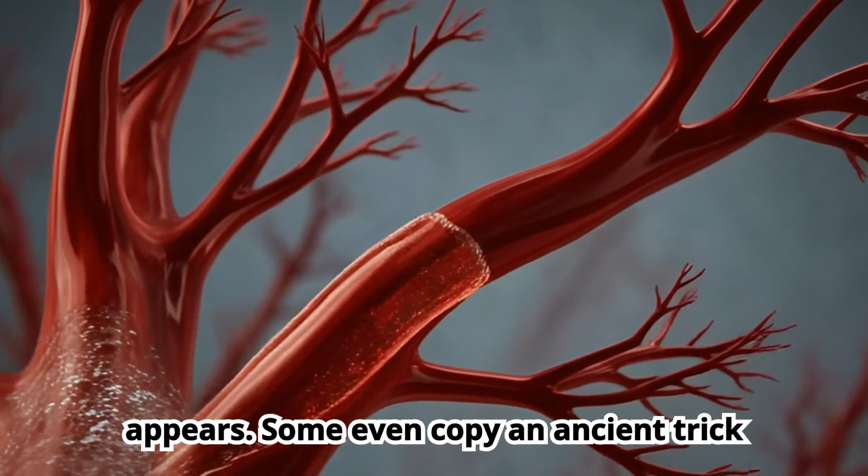Some even copy an ancient trick the Romans figured out 2,000 years ago, and then somehow forgot. This isn't theoretical. It's already being poured into tunnels, highways, offshore wind farms, and nuclear facilities. And if it scales, it could quietly reshape $1 trillion of global infrastructure, slash carbon emissions, and redefine how long

our civilization's foundations last. So why isn't everyone using it already? Why do most buildings still rely on a material we know is destined to crack? And why might the biggest obstacle to this breakthrough have nothing to do with science at all? That's where the real story begins.

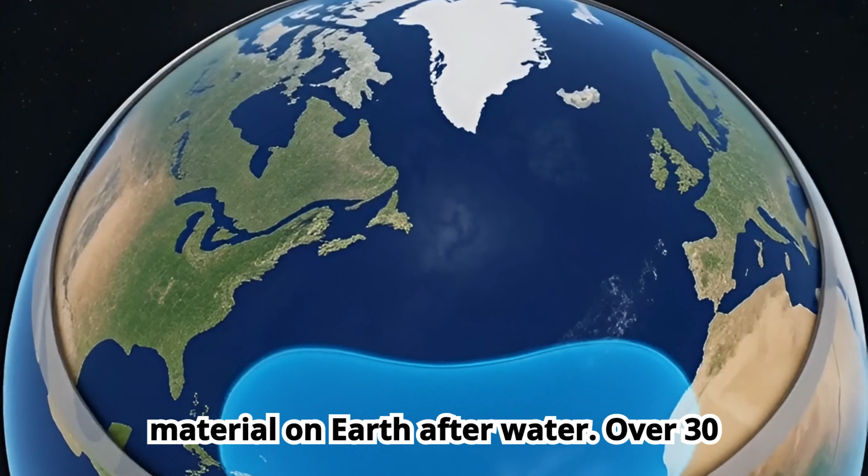Right now, while you're watching this, millions of concrete structures across the world are aging toward failure. Not dramatically, not visibly, quietly. Concrete doesn't fail like glass. It fails like debt, slowly, invisibly, then all at once. Here's the scale most people never think about. Concrete is the second most consumed material on Earth after water. Over 30 billion tons are poured every year. Entire civilizations are quite literally resting on it.

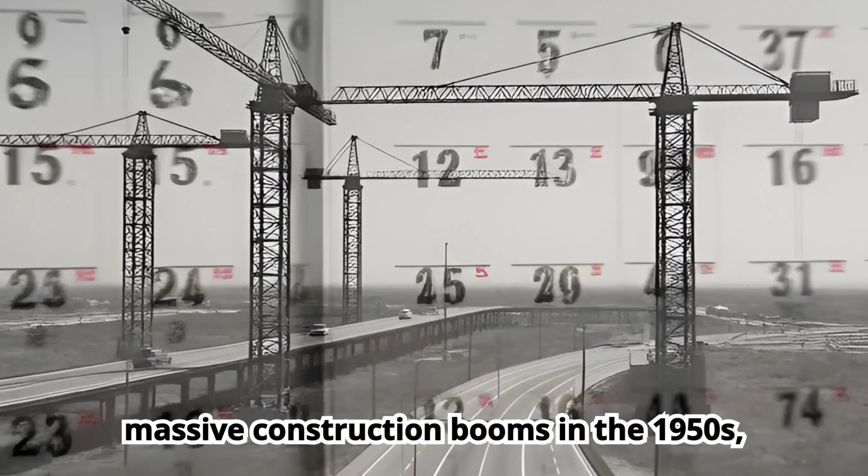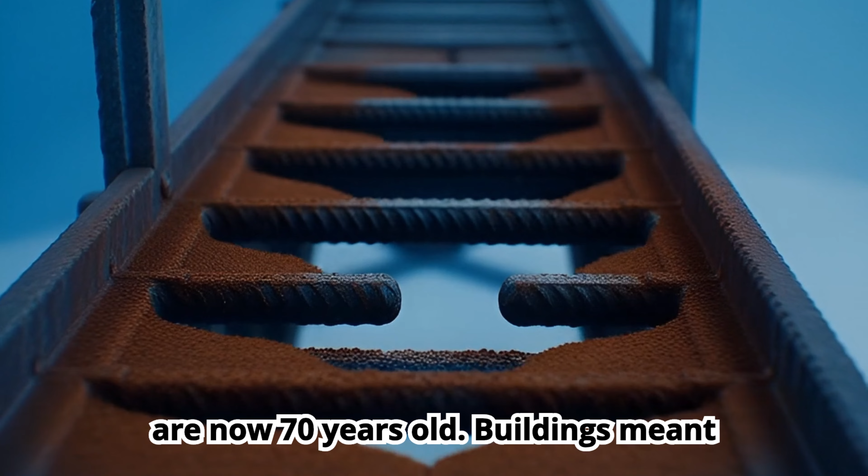And much of that concrete was poured during massive construction booms in the 1950s, 60s, and 70s, which means a huge percentage of global infrastructure is now entering its failure acceleration phase. Bridges that were designed for 50 years are now 70 years old. Buildings meant to last a century are quietly bleeding strength from the inside. Tunnels, dams, and foundations are absorbing decades of stress, salt, freeze-thaw cycles, and corrosion.

This isn't a future problem. It's a now problem. In the United States alone, engineers estimate trillions of dollars are needed just to keep existing infrastructure from collapsing into obsolescence. Globally, the number is far larger. And here's the brutal truth. We cannot afford to rebuild everything. Not financially, not logistically, not environmentally.

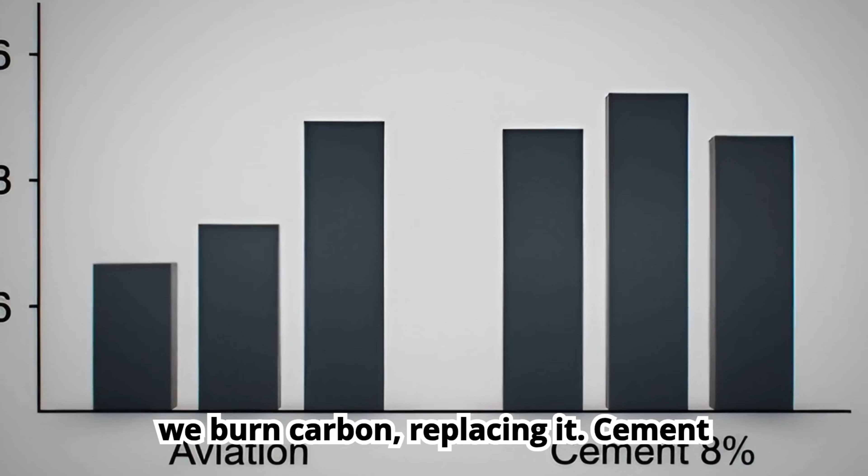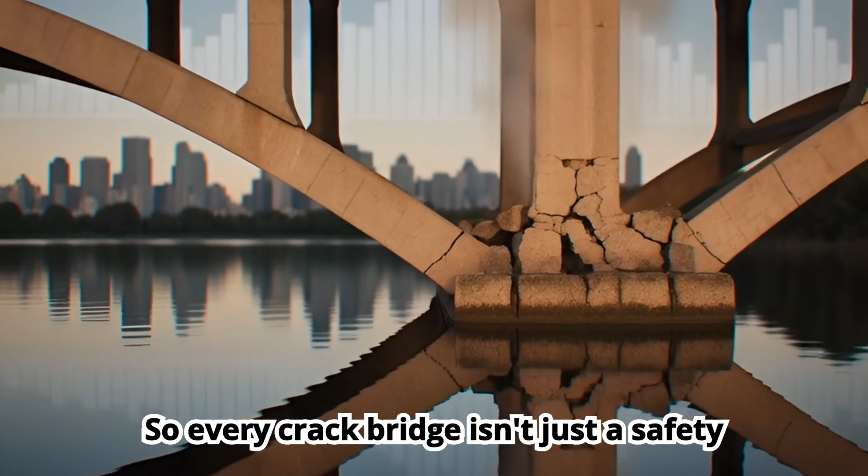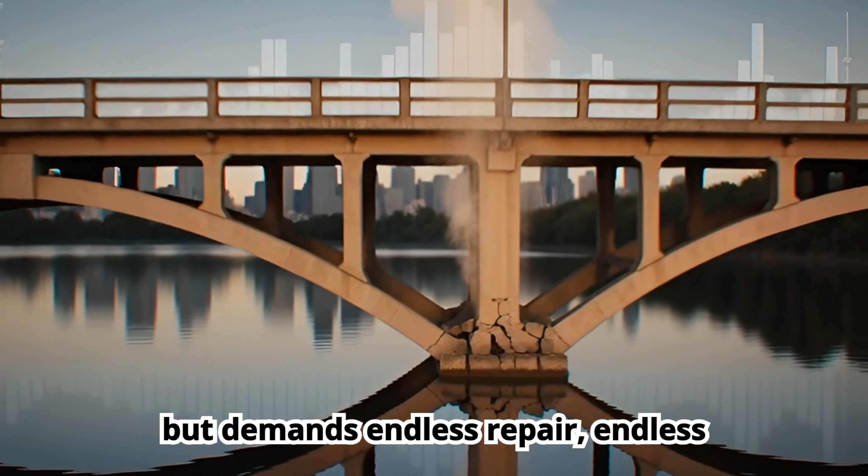Every time concrete fails, we don't just lose a structure, we burn carbon replacing it. Cement production alone accounts for roughly 8% of global CO2 emissions, more than the entire aviation industry. So every cracked bridge isn't just a safety risk, it's a climate liability. This is the trap modern civilization is stuck in, a material that enables growth, but demands endless repair, endless replacement, endless emissions. Unless the material itself changes, unless concrete stops behaving like something that slowly dies and starts behaving like

something that responds. Self-healing concrete doesn't just promise stronger structures. It promises fewer disasters, lower taxes, lower emissions, and infrastructure that doesn't wait to fail before it's fixed. But to understand how radical that is, we need to go back, not forward, back nearly 2,000 years, to a civilization that accidentally solved this problem once already, and then somehow lost the knowledge.

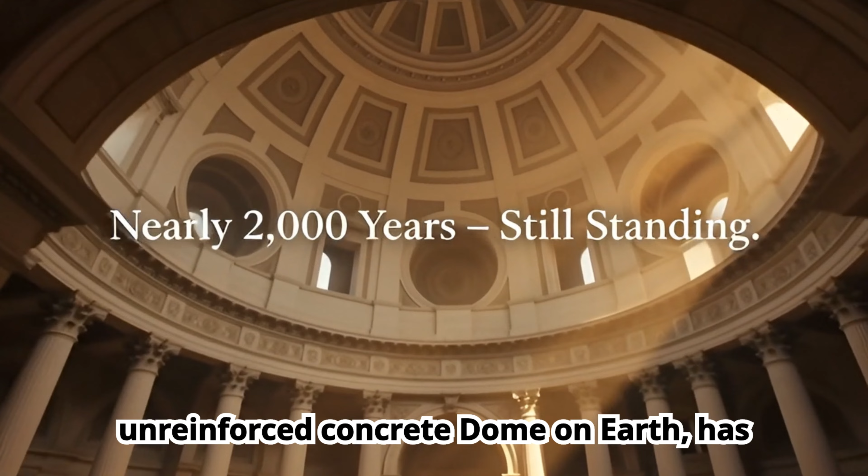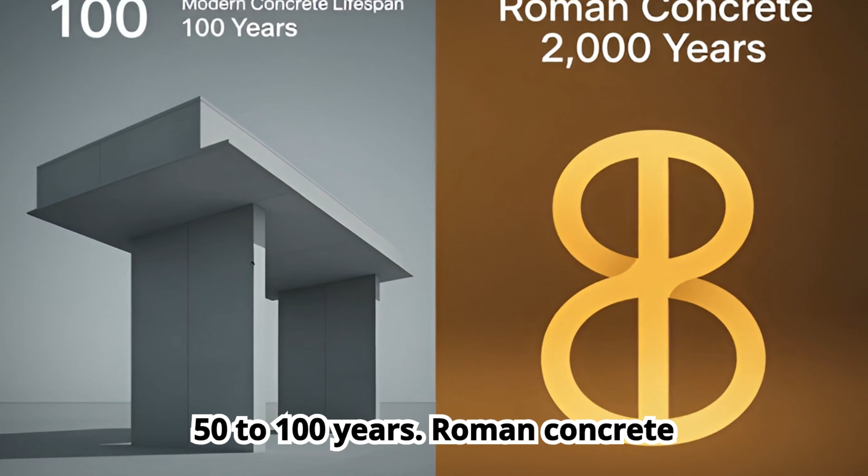Walk through the ruins of ancient Rome, and you'll see something unsettling. The Pantheon's dome, still the largest unreinforced concrete dome on Earth, has stood for nearly 2,000 years. Roman harbors sit submerged in seawater, yet remain intact. Break a piece of Roman concrete open, and instead of crumbling, it looks denser than when it was first poured. This shouldn't be possible. Modern concrete is engineered to last 50 to 100 years. Roman concrete has lasted 20 times longer in harsher conditions, without steel reinforcement, without modern chemistry.

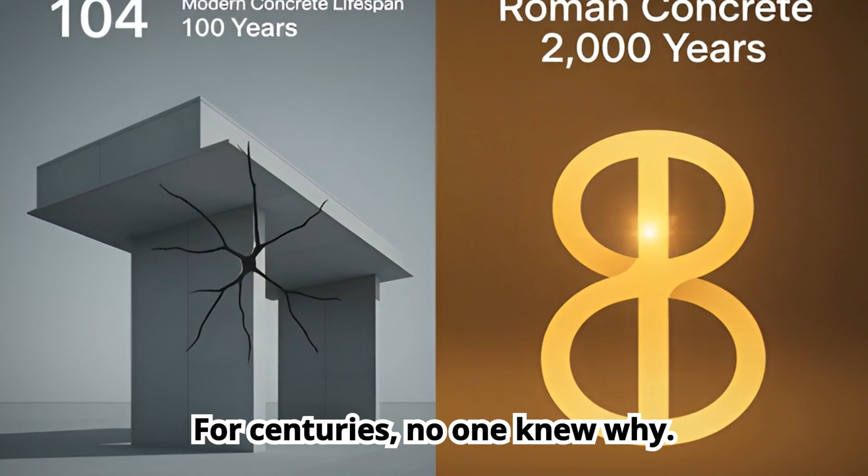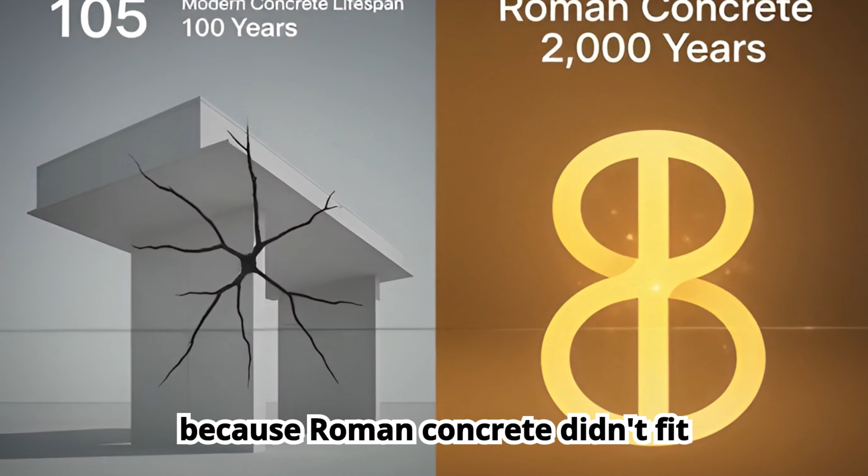For centuries, no one knew why. Historians assumed it was superior craftsmanship. Engineers blamed luck. Most modern builders simply ignored it because Roman concrete didn't fit industrial workflows. Then, in the last few decades, material scientists started looking closer, under microscopes, under X-rays, at the atomic level. And what they found changed everything.

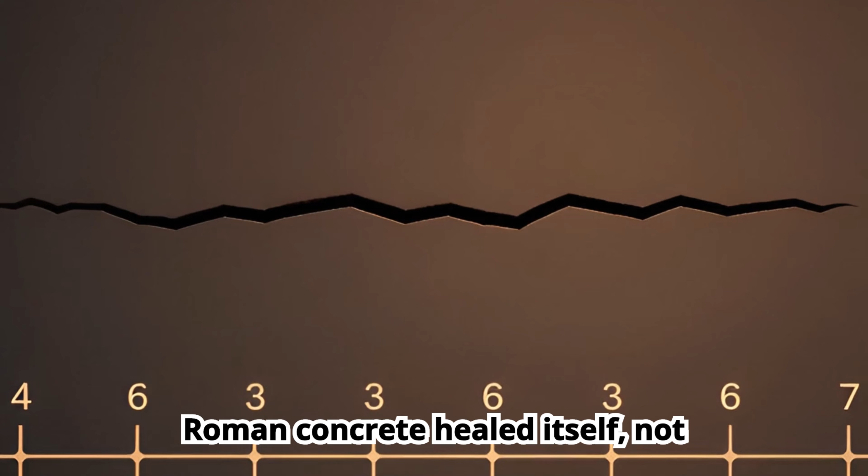Roman concrete wasn't uniform. It was alive with chemistry. Embedded throughout the material were tiny white mineral inclusions, once dismissed as poor mixing. In reality, they were reactive lime clasts. When cracks formed, water seeped in. The lime reacted. New minerals crystallized inside the crack, sealing it shut. In other words, Roman concrete healed itself. Not perfectly, not instantly, but continuously over centuries. This wasn't intentional biotechnology.

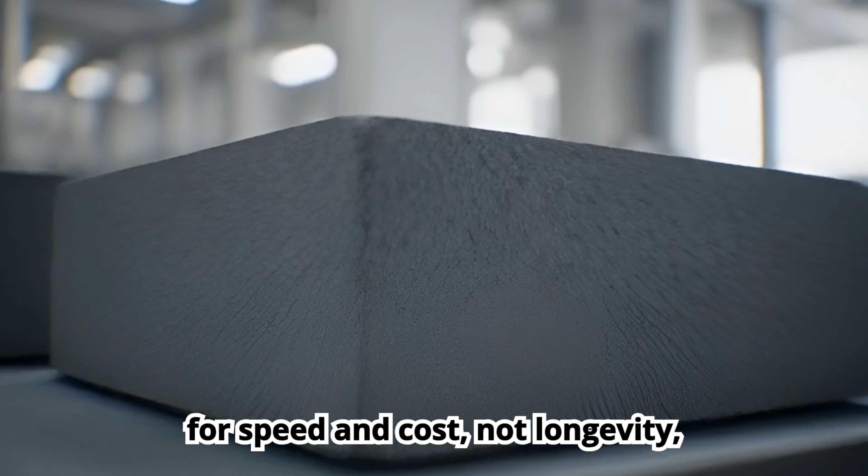It was an accidental discovery born from volcanic ash, quicklime, and a construction process that created built-in chemical redundancy. And here's the uncomfortable part. Modern engineering optimized concrete for speed and cost, not longevity. We standardized it, smoothed out its imperfections, removed the very features that allowed it to adapt. In the process, we made concrete cheaper and far more fragile.

Roman builders didn't know the science, but they understood something modern systems forgot. Durability isn't about resisting damage forever. It's about recovering from damage when it inevitably happens. That ancient insight is now colliding with modern science in a way the Romans could never have imagined, because today, self-healing concrete doesn't rely on accidents. It's engineered down to the microscopic scale. And the mechanisms scientists are using now are far more radical than lime and ash.

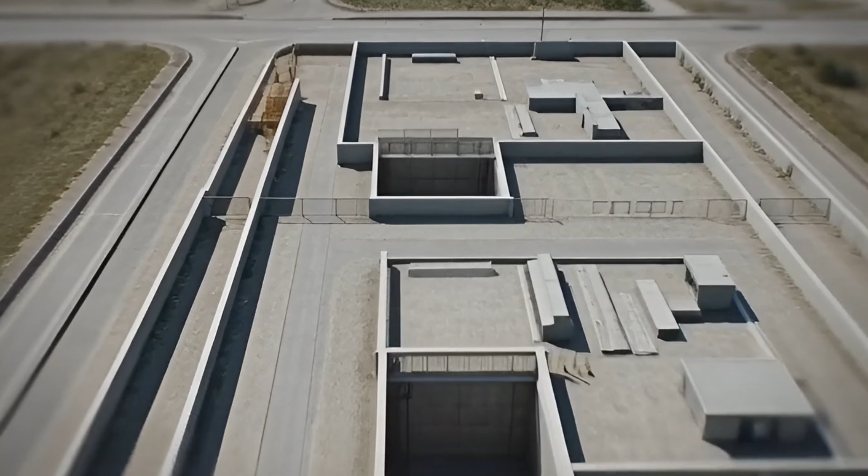To understand self-healing concrete, you have to let go of the idea that concrete is inert. It isn't. Concrete is a chemically active system that never fully stops reacting. Cracks don't mean it's dead. They mean stress has found a path. Self-healing concrete works by turning that weakness into a trigger. The most widely studied approach uses something that sounds almost absurd: bacteria. Specifically, dormant spores of bacteria that can survive for decades without food, oxygen, or light.

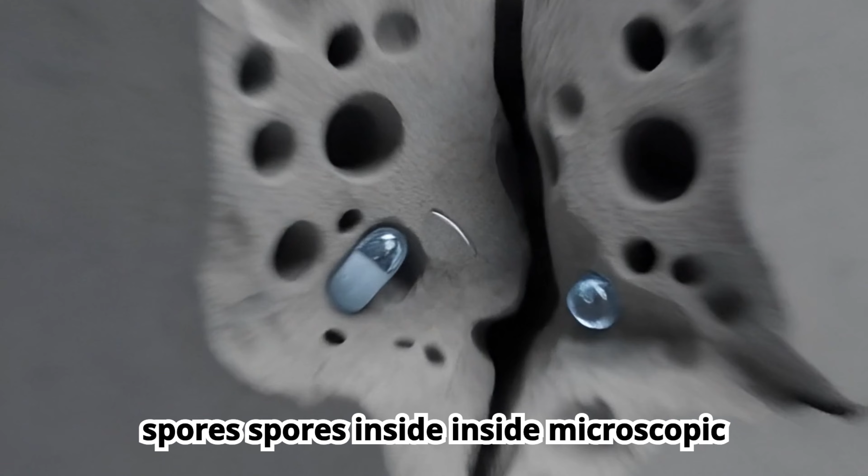Scientists embed these spores inside microscopic capsules mixed into fresh concrete. Alongside them, nutrients, often calcium lactate. When the concrete is intact, nothing happens. But when a crack forms, water enters. That water wakes the bacteria. They metabolize the nutrients and produce calcium carbonate, the same mineral found in limestone and seashells. The result? The crack fills itself with new stone. No sensors, no electronics, no human intervention. Just chemistry responding to damage.

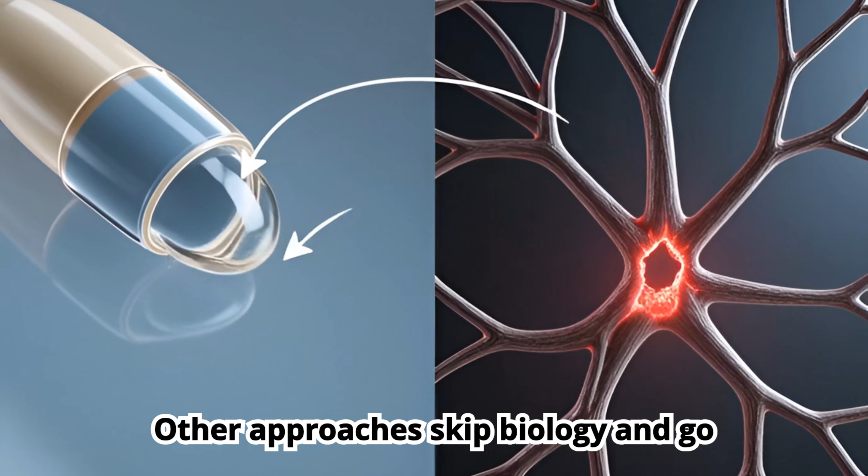Other approaches skip biology and go fully synthetic. Some use polymer microcapsules that rupture when cracks propagate, releasing liquid healing agents that solidify on contact with air or moisture. Others use vascular networks, tiny engineered channels that act like artificial blood vessels, delivering repair compounds precisely where they're needed. In all cases, the principle is the same. Damage isn't the end state. It's the signal. And here's what makes this revolutionary.

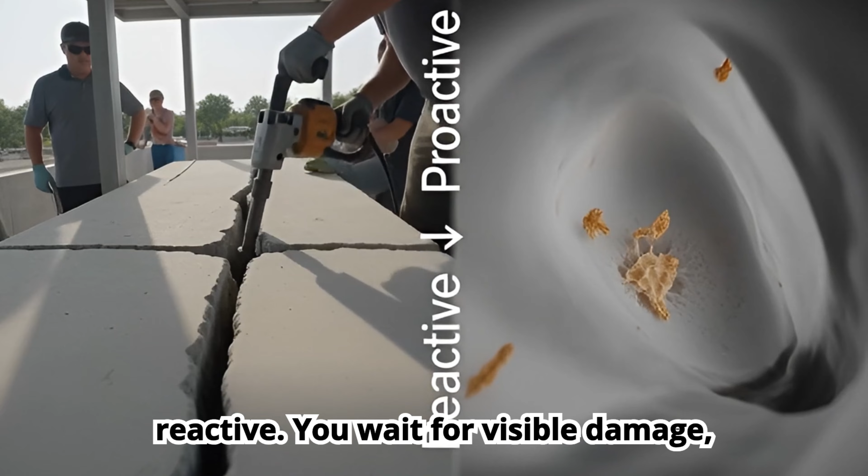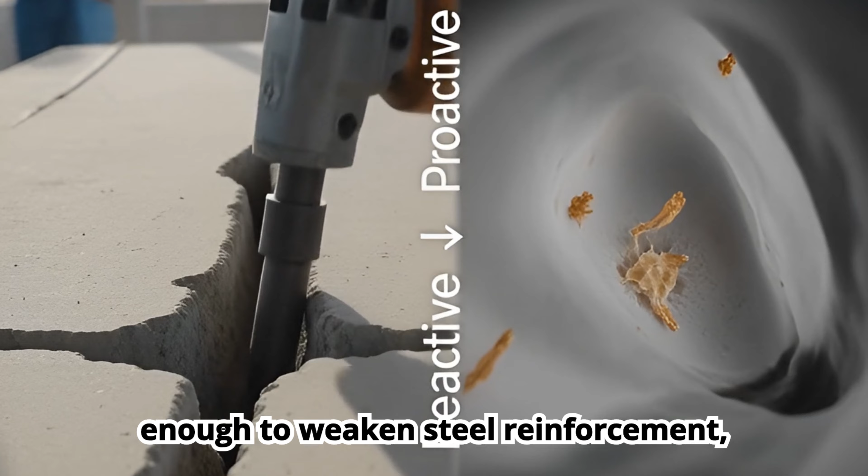Traditional concrete maintenance is reactive. You wait for visible damage. Then you patch. Self-healing concrete is proactive at the material level. It intervenes before cracks grow large enough to weaken steel reinforcement, allow corrosion, or trigger cascading failure. Think of it less like stronger concrete and more like concrete with an immune system.

But this first generation of self-healing materials has limits. They work best on small cracks. They cost more. And scaling them to millions of tons of infrastructure introduces challenges no lab test can fully simulate, which leads to the next twist in the story. Because the most promising breakthroughs aren't coming from adding more complexity. They're coming from making concrete simpler. And the solution might already exist inside the concrete we pour today.

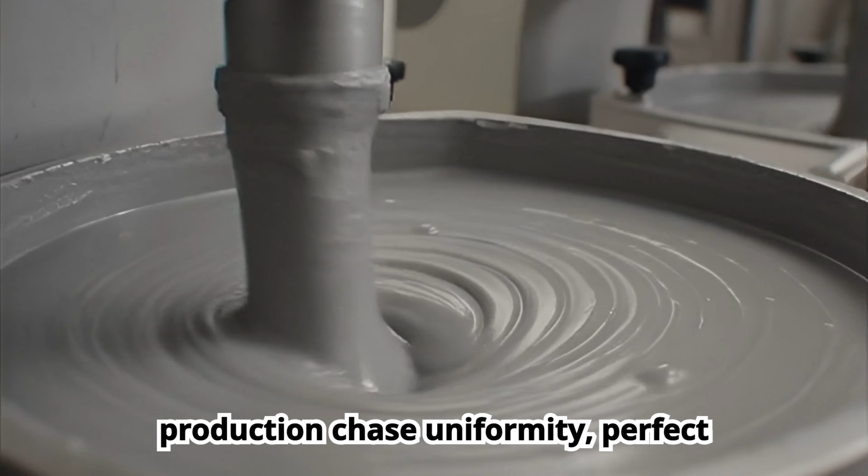Here's the twist that caught even material scientists off guard. Some of the most promising self-healing concrete doesn't rely on bacteria, polymers, or futuristic networks. It relies on doing something almost embarrassingly simple: not over-optimizing concrete. For decades, modern concrete production chased uniformity, perfect mixing, perfect consistency, perfect predictability. But in chasing perfection, engineers accidentally erased concrete's ability to respond.

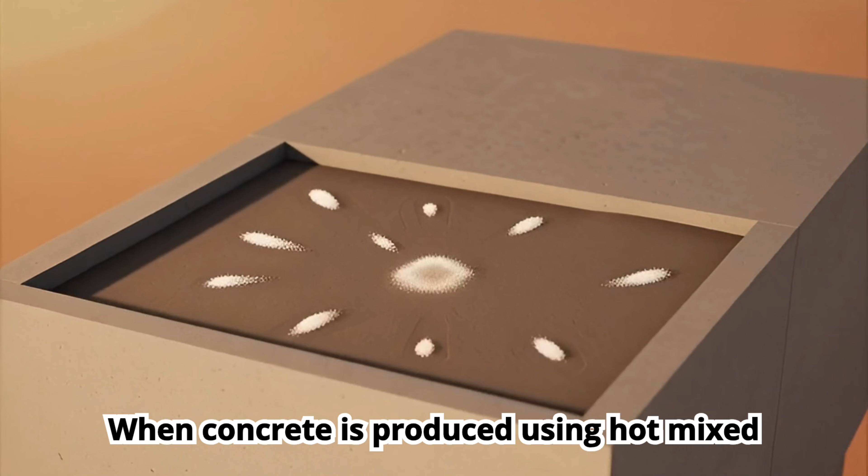Recent research showed that when concrete is produced using hot mix quicklime, a method similar to Roman techniques, it naturally forms reactive lime inclusions. Those inclusions act like built-in repair kits. When a crack forms and water enters, the lime dissolves, migrates into the crack, and recrystallizes, sealing it shut. No added capsules, no living organisms, no complex manufacturing changes, just chemistry that wants to reach equilibrium. Even more surprising, these inclusions also make cracks more visible and more likely to intersect healing zones, meaning the material guides damage toward repair pathways. It's not smarter technology. It's humble engineering.

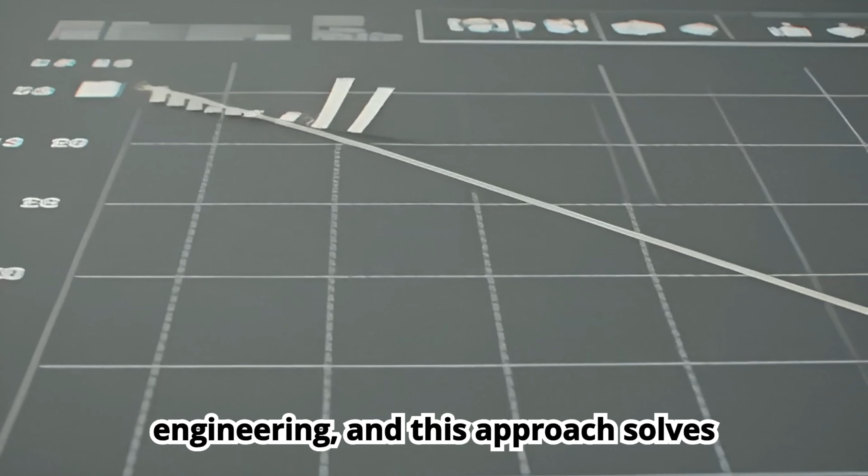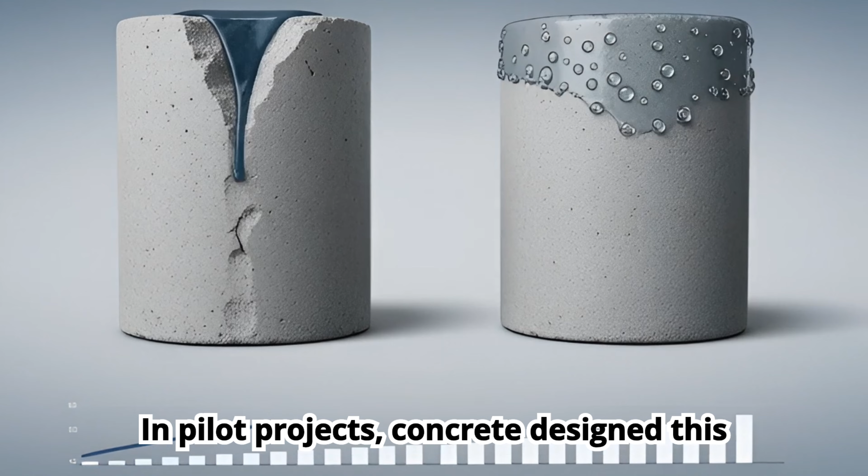And this approach solves several problems at once. Lower cost, higher compatibility with existing concrete plants, better long-term reliability. In pilot projects, concretes designed this way show dramatically reduced water permeability and longer structural life, without any exotic additives. The implication is unsettling. We didn't need to invent a miracle material. We needed to stop stripping away resilience in materials we already had.

But this raises a new question. If self-healing concrete can be cheaper, simpler, and longer lasting, why isn't it everywhere? Why are most bridges, buildings, and roads still poured with materials we know will fail? The answer has very little to do with science, and everything to do with how modern systems decide what gets built. On paper, self-healing concrete looks like a solved problem.

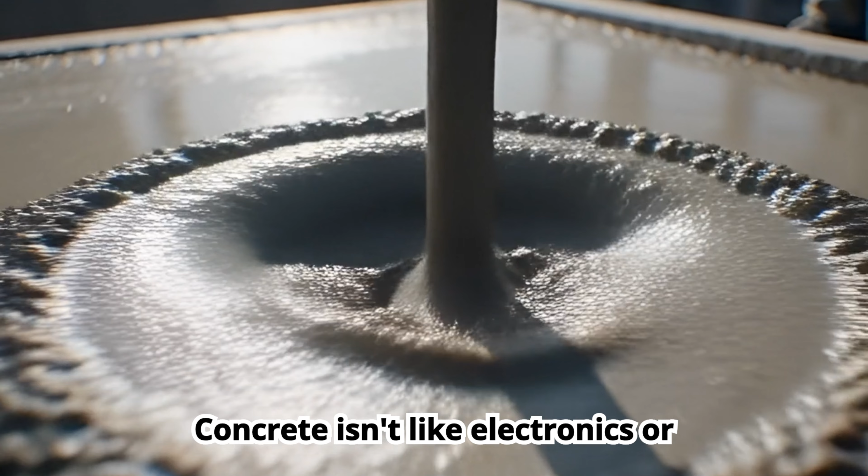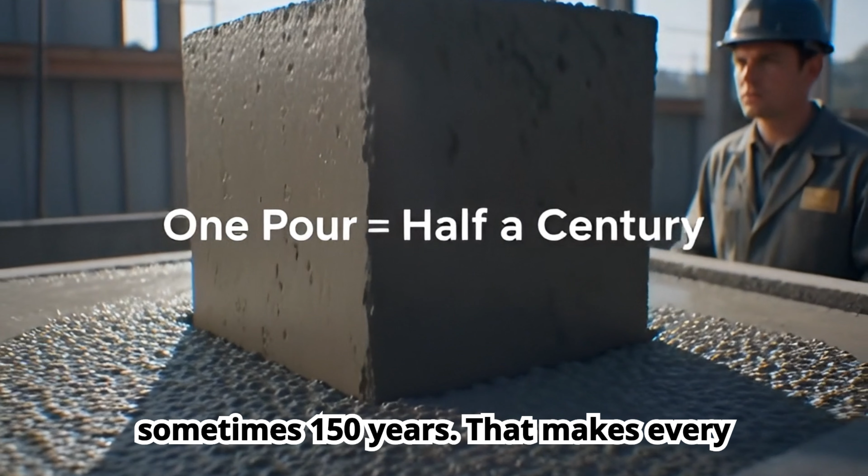Multiple working mechanisms, repeatable lab results, decades of research, and yet adoption is painfully slow. The reason is a gap that kills more innovations than bad science ever could. The scale gap. Concrete isn't like electronics or software. You don't update it. You don't patch it later. Once it's poured, it's locked in for 50, 100, sometimes 150 years. That makes every change terrifying.

Infrastructure projects are designed around risk minimization, not innovation. Engineers are legally responsible for failures that may happen decades after they retire. Contractors are paid to deliver on time and on budget, not to experiment. So even if a new concrete is better, if it's unfamiliar, it's risky.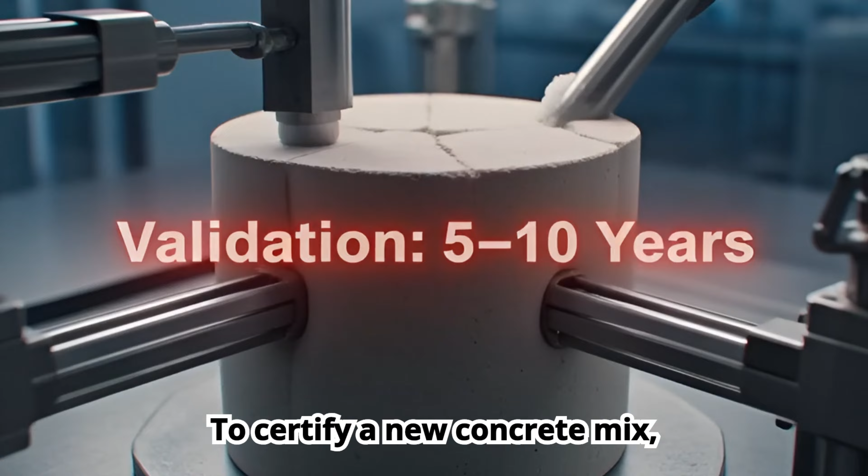Then there's testing. To certify a new concrete mix, regulators demand performance data across freeze-thaw cycles, salt exposure, seismic stress, and decades of simulated aging. That testing can take years. And self-healing behavior adds a paradox. You have to let the concrete crack to prove it heals. That's hard to standardize.

Cost is another friction point. Even a 10 to 20% price increase per cubic meter can kill adoption when projects involve millions of tons of material. Decision makers often ask a short-sighted question. Why pay more now for damage that hasn't happened yet? That logic works. Until it doesn't.

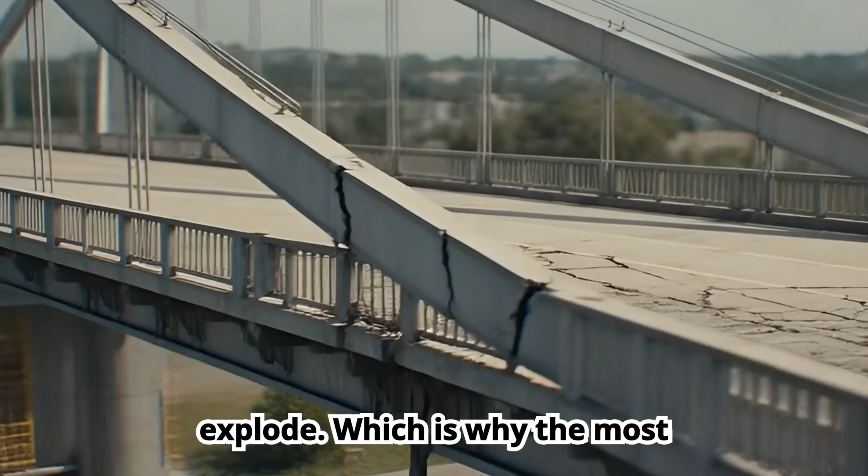Because once failure begins, repair costs explode, which is why the most interesting progress isn't happening in highways or office buildings. It's happening in places where failure is not an option, where repair is impossible, where longevity is worth any upfront cost. And in those extreme environments, self-healing concrete isn't a luxury. It's a necessity.

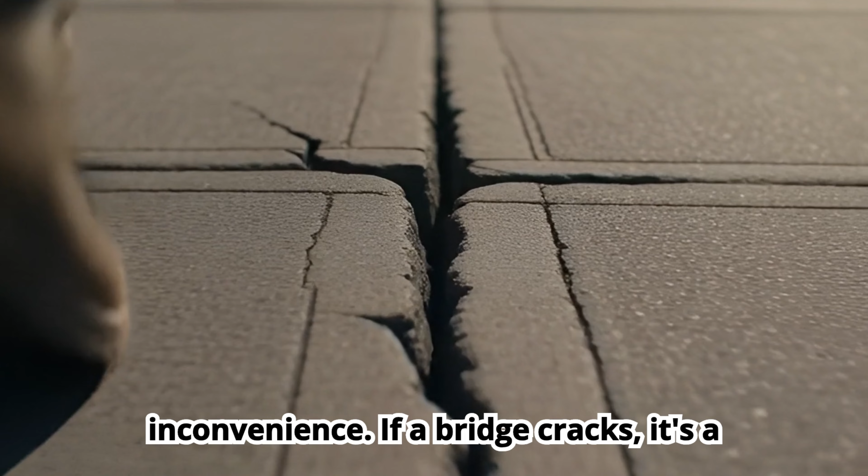If a sidewalk cracks, it's an inconvenience. If a bridge cracks, it's a crisis. But there are places where concrete failure is something far worse. Places where repair is impossible, where access is limited, where mistakes don't just cost money, they risk catastrophe. That's where self-healing concrete quietly moved from theory to reality. One of the earliest real-world adopters wasn't a city. It was the energy sector.

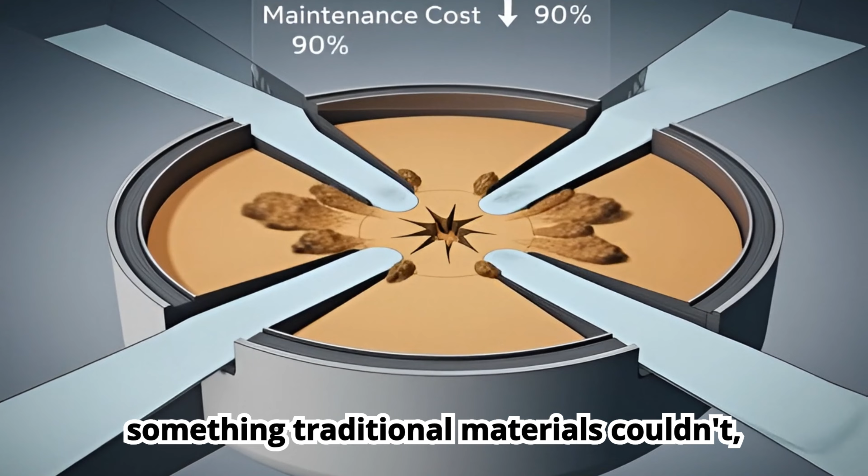Offshore wind turbines rely on massive concrete foundations, constantly battered by waves, salt water, and cyclic loading. Sending repair crews is expensive, dangerous, and sometimes impossible. Self-healing concrete offered something traditional materials couldn't, a chance to never need those repairs.

Similar logic drove adoption in underground tunnels and wastewater infrastructure, where cracks mean leaks, contamination, and long-term structural decay. In these environments, bacteria-based healing systems proved especially effective. The bacteria don't care about darkness. They don't care about pressure. They don't care about decades of silence. They wait, and when water finds a crack, they respond.

But the most striking example comes from nuclear containment structures. Here, microcracks are unacceptable. Even tiny leaks can escalate into long-term risk. Self-healing concretes are being studied and deployed to seal microfractures before they can ever propagate. No press releases, no hype, just quiet material decisions made by engineers who understand one thing deeply. Prevention is always cheaper than regret.

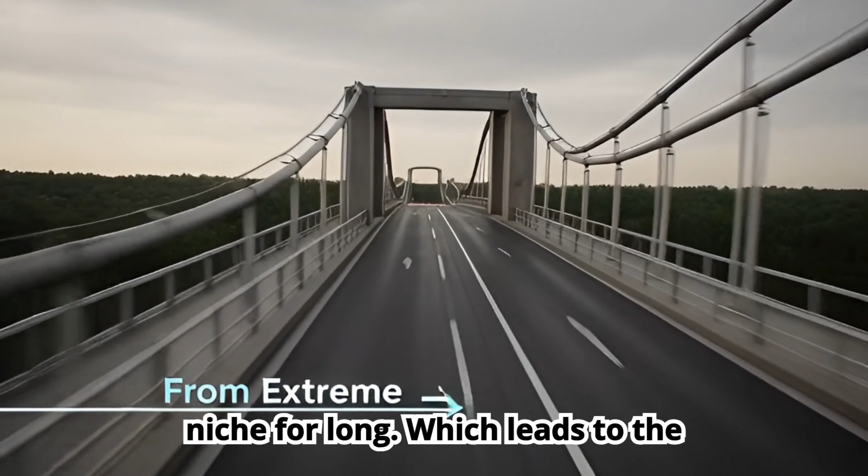These early adopters aren't chasing innovation for its own sake. They're chasing certainty. And once materials prove themselves in the harshest conditions imaginable, they don't stay niche for long, which leads to the next cascade. Because if concrete can heal itself in offshore storms and radioactive environments, what happens when that same logic is applied everywhere else?

Once self-healing concrete works in the most extreme environments, something inevitable happens. It spreads, not all at once, not everywhere, but in a cascade, starting where it saves the most pain. Roads and highways are an obvious next step. Microcracks form within months of heavy traffic. Water enters. Freeze-thaw cycles tear them open. Self-healing concrete changes that dynamic. Cracks seal before water penetrates. Salt stays out. Rebar stays protected. That alone can double a road's service life.

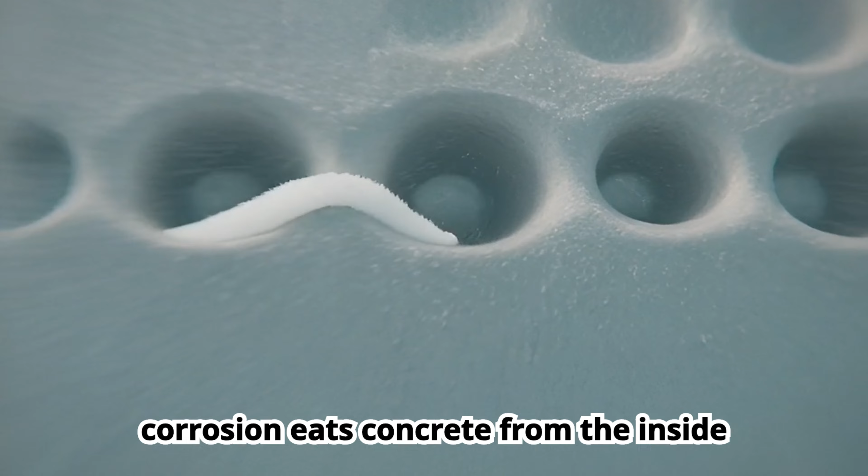In cities, buildings benefit differently. Foundations experience slow, uneven settlement. Tiny cracks form, not enough to trigger alarms, but enough to weaken structures over decades. Self-healing materials arrest that damage early. In coastal regions, where saltwater corrosion eats concrete from the inside out, healing mechanisms act as constant defense.

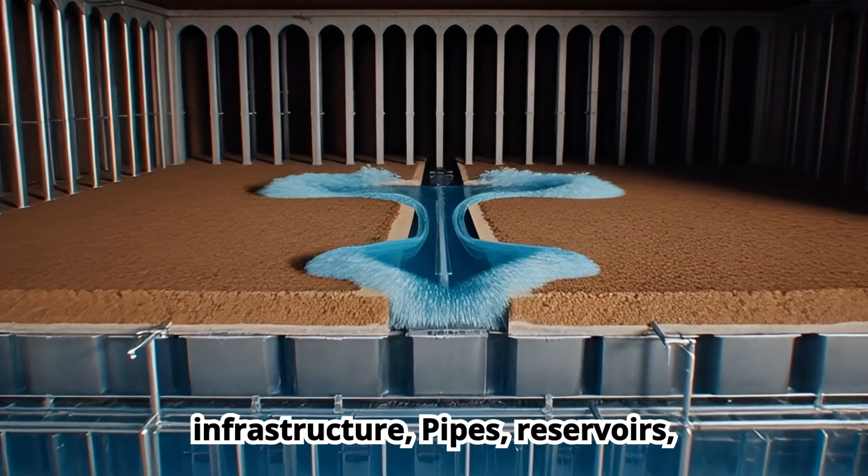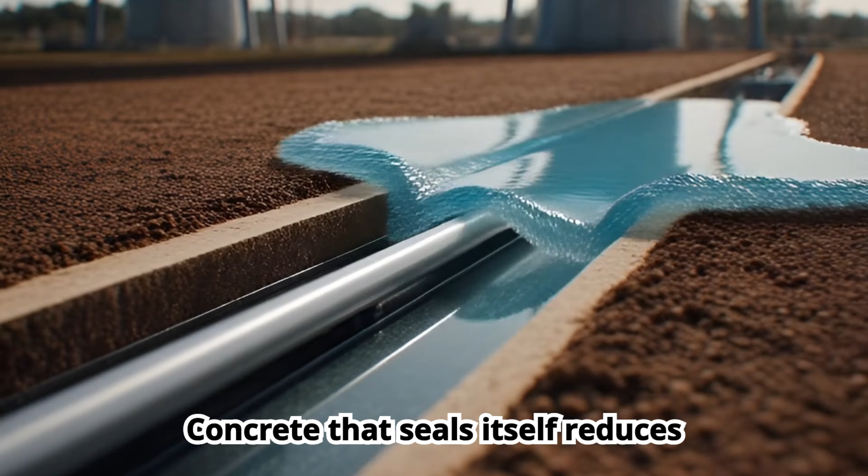Then there's a quieter, less obvious application. Water infrastructure, pipes, reservoirs, treatment plants. Leaks don't just waste water. They destabilize surrounding soil and undermine entire systems. Concrete that seals itself reduces loss, contamination, and collapse risk simultaneously.

And perhaps the most profound shift is economic. Instead of budgeting for endless inspection, repair, and replacement cycles, cities can budget for longevity. That changes how infrastructure is planned, how taxes are allocated, how risk is priced.

But there's an even larger implication hiding beneath all of this, because concrete isn't just a material, it's a template. If we can teach the most widely used material on Earth to respond to damage, what does that mean for every other material we depend on? Polymers, metals, composites. Self-healing concrete isn't the end of the story. It's the opening chapter of a new design philosophy, one where materials aren't passive. They participate.

Self-healing concrete sounds like an obvious upgrade, but engineers are trained to distrust anything that behaves unpredictably, because healing is not the same as control. Most self-healing systems are designed to repair microcracks, not major structural damage. They're preventative, not miraculous. If a bridge column fractures under overload, bacteria won't save it. If a foundation shifts beyond its design limits, chemistry can't rewrite physics. That distinction matters, because hype blurs it.

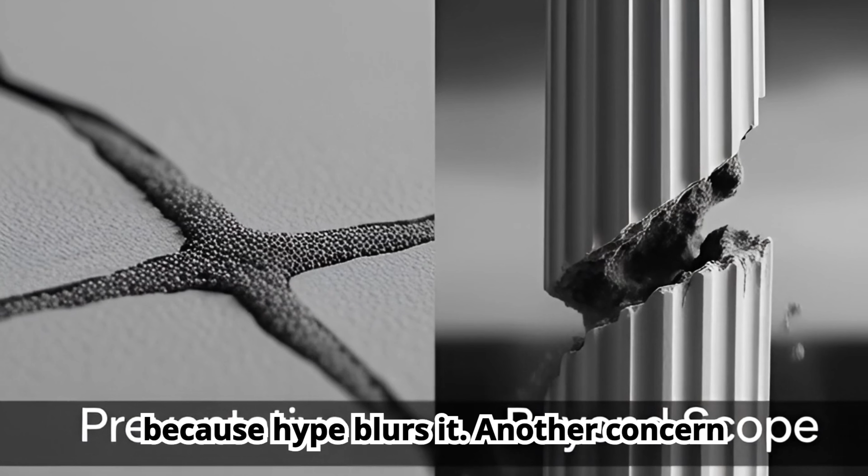Another concern is time. Healing doesn't always happen instantly. Some systems take days or weeks to fully seal cracks. In certain structures, that delay could still allow corrosion or leakage.

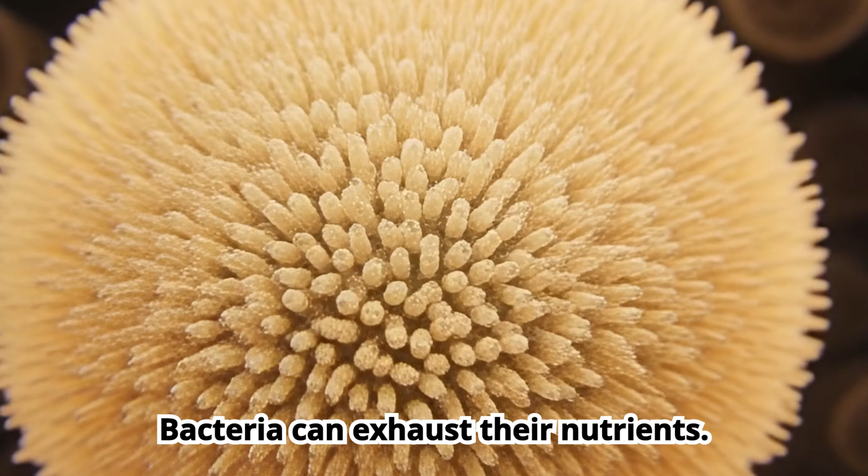Then there's durability of the healing mechanism itself. Bacteria can exhaust their nutrients. Microcapsules can rupture only once. Chemical reactions can run out of reactive material. After enough damage cycles, the concrete may stop responding, which raises a deeply uncomfortable question for engineers. How do you certify something that changes over time?

Traditional materials are static. You test them, rate them, and assume they behave the same way forever. Self-healing materials are dynamic. They age. They react. They adapt. That breaks existing standards. And standards aren't just bureaucracy. They're safety nets built on hard-earned failures.

There's also the question of unintended consequences. What if healing seals cracks that engineers need to see? What if it masks warning signs of deeper structural issues? What if reliance on self-healing encourages riskier design margins? These aren't abstract concerns. They're the reason adoption is cautious, incremental, and heavily scrutinized.

But tension doesn't stop progress. It refines it. And right now, researchers are doing something critical. They're redesigning self-healing concrete, not as a replacement for inspection, but as a partner to it. And that shift, from autonomy to collaboration, is unlocking the next breakthrough.

Here's the quiet shift happening behind the scenes. The future of self-healing concrete isn't autonomous. It's instrumented. The most advanced research no longer treats concrete as a passive block that magically fixes itself. It treats it as a system, one that senses, reports, and responds. Instead of hiding damage, next-generation self-healing concrete is designed to expose it intelligently.

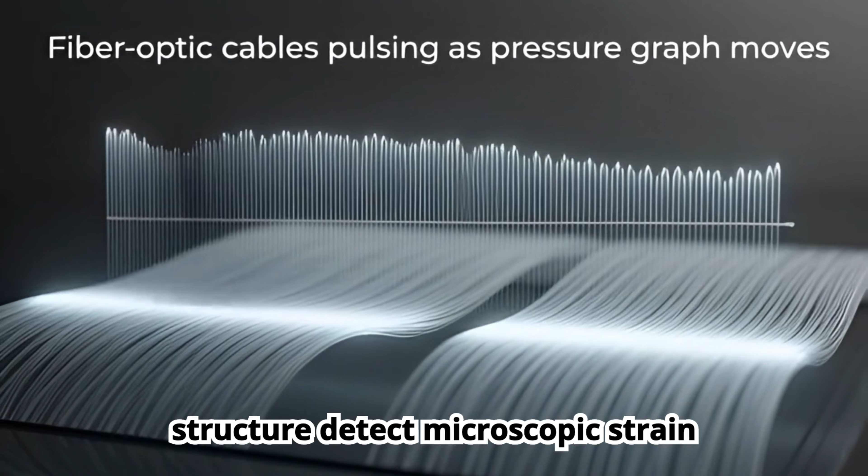Fiber optic strands embedded inside the structure detect microscopic strain changes long before visible cracks form. Electrical resistance measurements track internal fracture growth in real time. Acoustic signals capture the sound of cracking as it happens. The concrete doesn't just heal, it alerts.

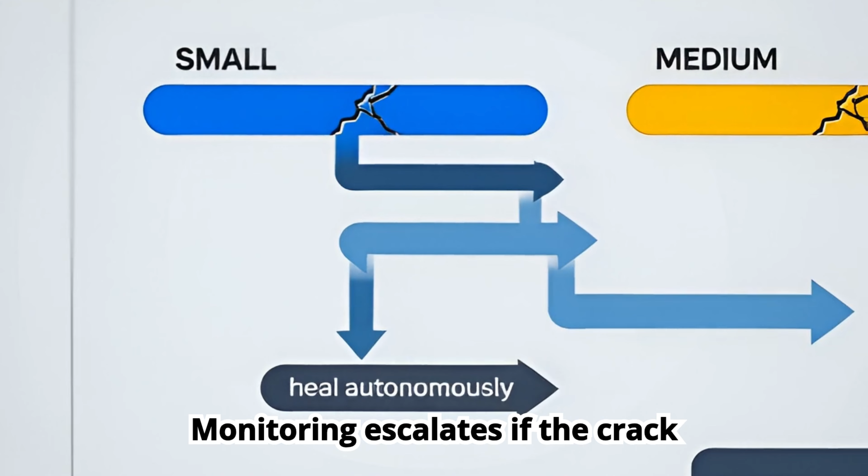When a crack forms, the system knows where it is, how fast it's growing, whether healing succeeded, whether intervention is required. Healing becomes conditional, not blind. If the crack is small, passive healing activates. If the crack persists, monitoring escalates. If the crack grows, engineers are notified before failure cascades.

This changes everything, because now self-healing concrete isn't hiding risk. It's compressing response time. Failures like Champlain Towers didn't happen because damage was invisible. They happened because damage was slow, cumulative, and ignored. Self-healing systems flip that equation. They slow deterioration and make it impossible to miss. This is why regulators are starting to soften, not because the concrete is smarter, but because the oversight is.

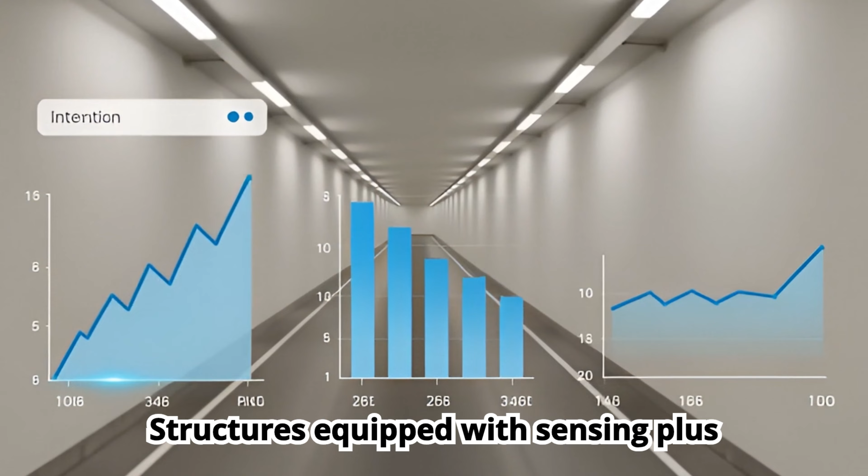In testing, structures equipped with sensing plus healing show earlier intervention windows, fewer emergency repairs, and dramatically reduced inspection uncertainty. The material isn't replacing engineers, it's extending them. And once concrete becomes something you can continuously interrogate, not just inspect every 5 years, the economic math starts to break. Because now maintenance becomes predictive instead of reactive, and that's when costs collapse.

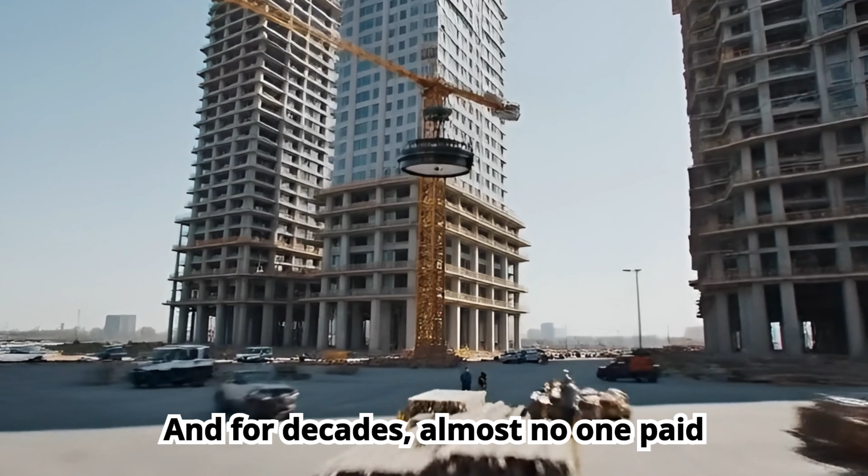For decades, better concrete existed. And for decades, almost no one paid extra for it. Because construction doesn't reward longevity. It rewards lowest upfront cost. That's the paradox self-healing concrete had to break. And it's finally breaking it. Not because engineers changed, but because money did.

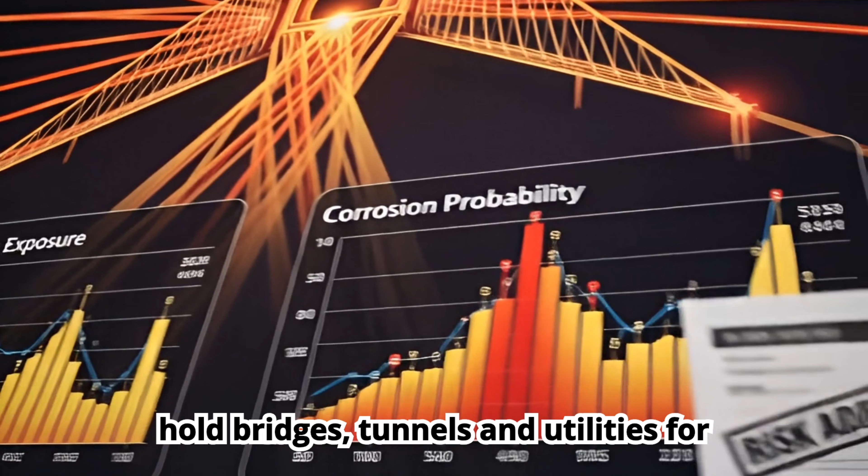Here's the shift. Infrastructure is no longer priced as a one-time asset. It's being priced as a risk-adjusted, long-duration liability. Insurance companies now model climate stress, corrosion risk, and failure probability across decades. Pension funds hold bridges, tunnels, and utilities for 30 to 70 years. Governments are issuing infrastructure bonds tied to performance metrics, not just construction cost. In that world, concrete that quietly degrades is a financial threat.

Self-healing concrete does two things investors care deeply about. It extends asset life. It reduces uncertainty. And uncertainty is what destroys long-term returns. When a bridge has embedded monitoring and autonomous crack repair, its risk profile changes. Lower failure probability means lower insurance premiums, lower maintenance reserves, higher bond ratings, cheaper financing. A 20 to 40% increase in material costs becomes irrelevant if it cuts lifetime risk in half.

This is why patient capital is moving in. Climate-focused funds, sovereign wealth funds, and infrastructure investors don't need 5-year exits. They need predictability. Self-healing concrete offers something rare in infrastructure, a way to lock in durability upfront. That's also why major incumbents, cement giants, insurers, and reinsurance firms are now involved, not because it's futuristic, because it's actuarially attractive. And once insurers start pricing structures differently based on material intelligence, adoption stops being optional. It becomes financial gravity. If self-healing concrete makes so much sense, why isn't it everywhere already?

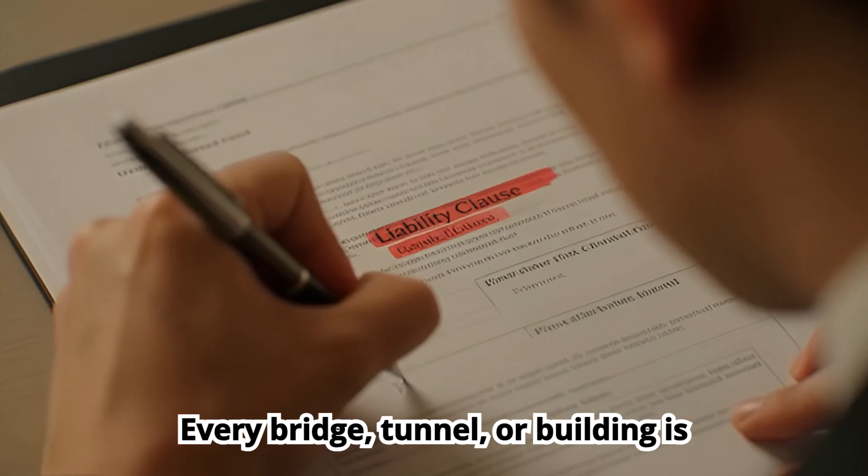Because construction isn't just an industry. It's a legal, cultural, and procedural ecosystem built to avoid blame. Innovation isn't rewarded. Familiarity is. Every bridge, tunnel, or building is signed off by licensed engineers whose careers depend on one thing: nothing going wrong. Using a new material, even a better one, creates liability asymmetry.

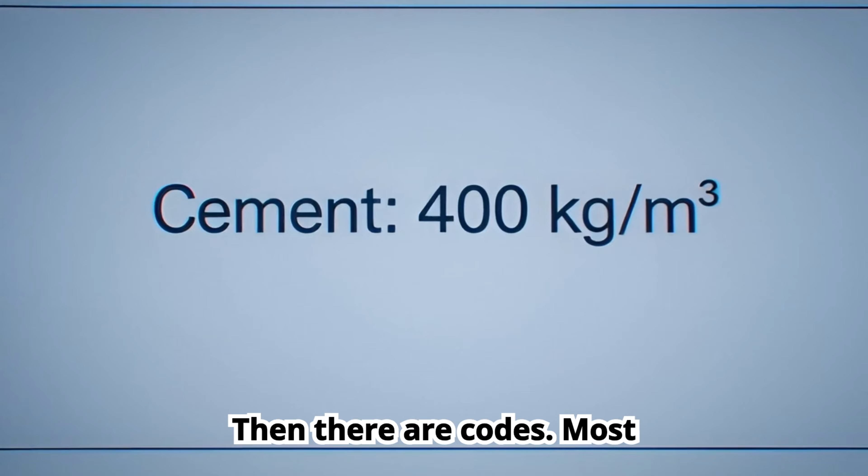If standard concrete fails, the failure is unfortunate. If novel concrete fails, it's negligence. That fear alone slows adoption by years. Then there are codes. Most building codes don't describe performance. They describe recipes: exact cement ratios, specified admixtures, approved methods.

Self-healing concrete doesn't fit neatly into that framework. It behaves correctly, but not traditionally. Changing codes requires years of field data, multiple standards bodies, conservative consensus. That's a 10 to 20-year cycle.

Next is fragmentation. Construction isn't dominated by a few players. It's millions of contractors, suppliers, inspectors, and municipalities, each with their own incentives. No single actor captures the full benefit of durability. The builder wants speed. The developer wants lower cost. The owner wants longevity. The city wants safety. Self-healing concrete benefits the last two, but is paid for by the first two.

That misalignment stalls everything. And finally, training. New materials mean new mixing protocols, new curing requirements, new inspection standards. That demands retraining an enormous global workforce. This is why adoption isn't explosive.

It's selective. Self-healing concrete shows up first where failure is unacceptable, access for repair is difficult, and lifespan is mission critical. Tunnels, nuclear facilities, offshore wind foundations, water infrastructure, not parking garages, not sidewalks.

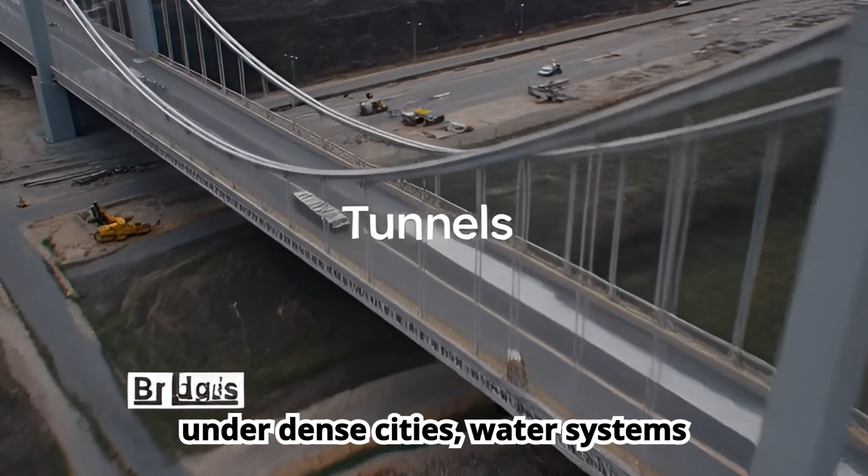Governments quietly deploy self-healing systems in bridges with no redundancy, tunnels under dense cities, water systems where leaks are catastrophic. Insurance companies begin tracking loss reduction. Regulators begin writing performance-based clauses instead of prescriptive ones. Nothing looks dramatic yet, but the data pile grows.

Phase 2, 2030 to 2040, mandated durability. This is the inflection point. Carbon pricing, embodied carbon limits, and maintenance liabilities converge. If a structure can last twice as long using the same raw materials, regulators start asking, why didn't you? At this stage, self-healing additives are written into infrastructure specs.

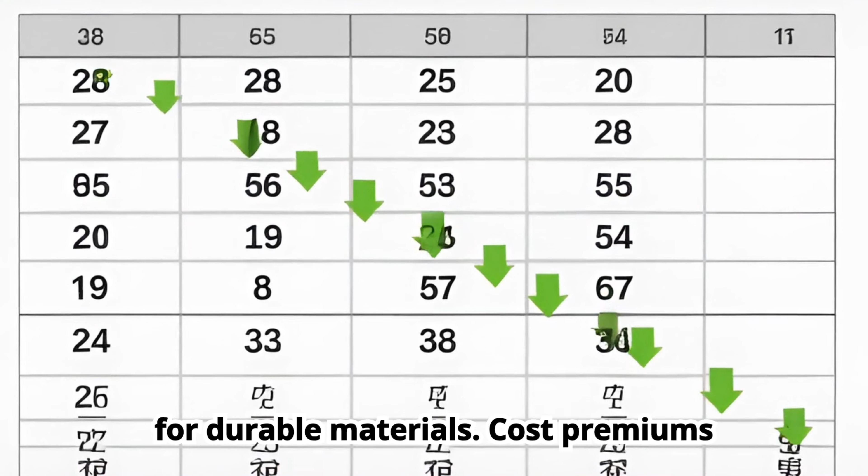Public projects require life cycle cost justification. Insurers discount premiums for durable materials. Cost premiums shrink through scale. Engineers stop asking if it works and start asking which system to use.

Phase 3, 2040 to 2050, the invisible standard. By now, most concrete quietly heals itself. No branding, no headlines, no novelty, just fewer cracks, fewer inspections, fewer failures. The technology disappears into normalcy. That's how real infrastructure change happens, not as a miracle, as a default.

And here's the part that matters most. Once durability becomes regulated, non-healing concrete becomes a risky option. That flips the entire market. At that moment, adoption doesn't spread because it's innovative. It spreads because not using it becomes indefensible. And when that happens, the trillion-dollar number stops sounding ambitious. It starts sounding conservative.

Self-healing concrete isn't really about concrete. It's about time. Every crack that seals itself delays decay. Every structure that lasts longer delays replacement. Every replacement we avoid delays emissions, disruption, and disaster. That's the hidden leverage. Concrete doesn't fail loudly at first. It fails quietly, over decades, until suddenly it doesn't.

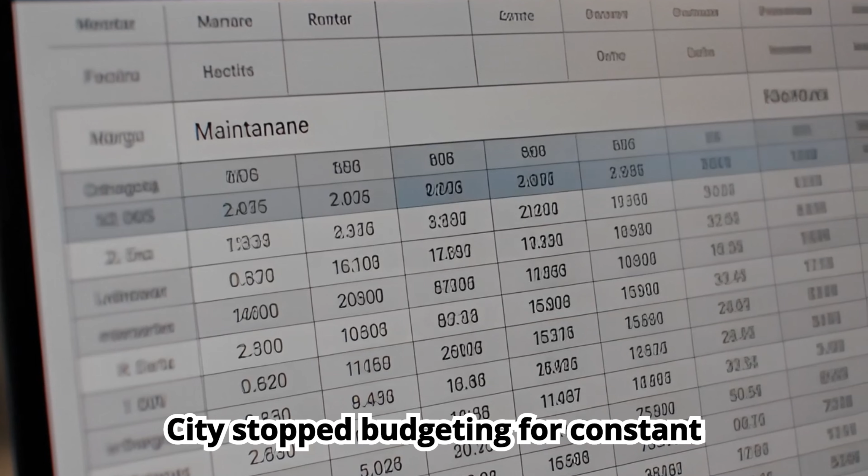Self-healing materials interrupt that curve. They flatten the slow decay phase and postpone the cliff. And that changes everything downstream. Cities stop budgeting for constant repair. Governments stop choosing between safety and affordability. Engineers design for lifetimes, not inspection cycles.

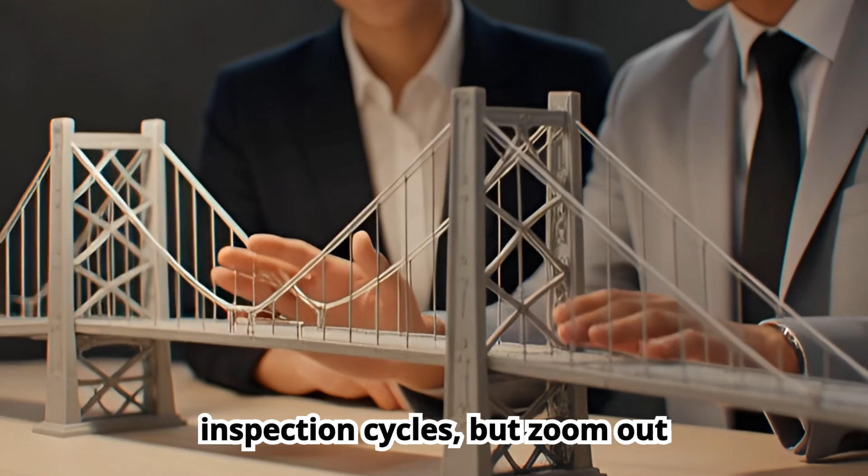But zoom out further. Concrete is the physical backbone of housing, transportation, energy, water, defense. When that backbone becomes self-repairing, society becomes more resilient without having to move faster, work harder, or build more. That's rare. Most climate solutions ask us to sacrifice. This one asks us to waste less.

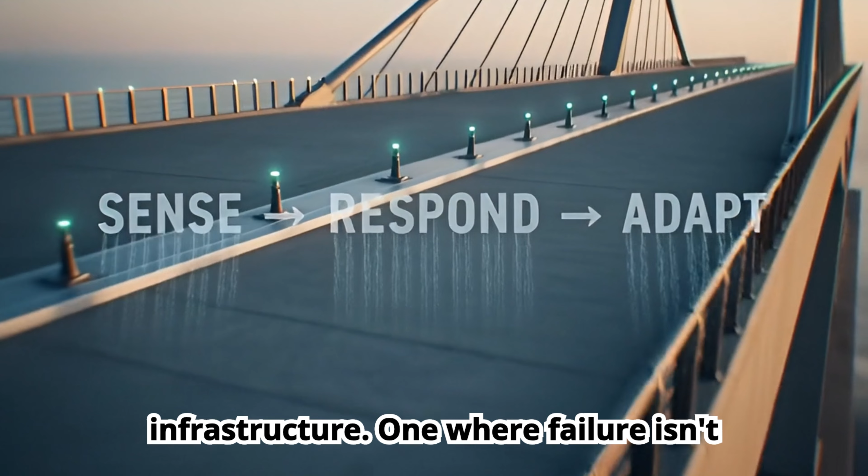And there's a deeper shift happening. For centuries, our materials were passive. They obeyed physics, and that was it. Self-healing concrete is different. It senses damage. It responds. It adapts. That's not a new material category. That's a new philosophy of infrastructure. One where failure isn't surprise. It's an input. And once we accept that idea, it doesn't stop at concrete.

It spreads to self-healing metals, adaptive grids, autonomous maintenance systems, infrastructure that doesn't just stand there, but participates in its own survival. So, when people ask, is this really worth $1 trillion? They're asking the wrong question. The right one is, what is stability worth in an unstable world?

Because the most valuable technologies of the future won't be the fastest. They'll be the ones that quietly prevent catastrophe. And those rarely make headlines until the day they save us. That's the story of self-healing concrete, not as a miracle, but as a turning point.